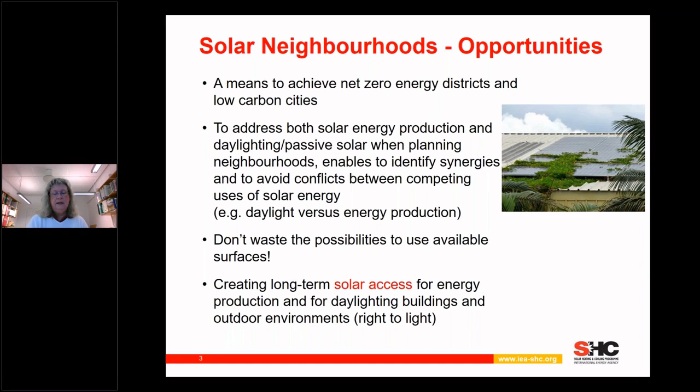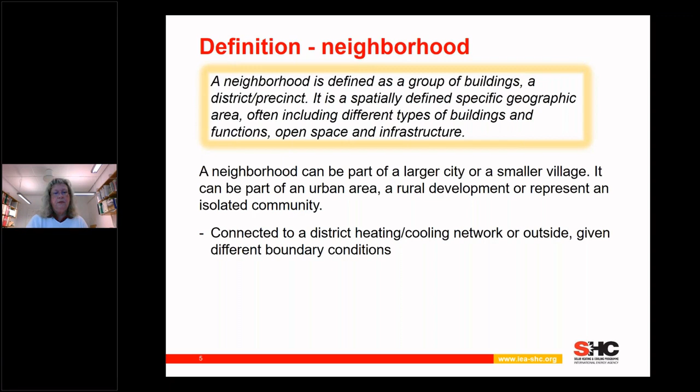Going to the project specifically: we started in 2019, and the project ends at the end of 2023, so we are midway now. The objective is to support key players to achieve solar neighborhoods that facilitate long-term solar access through good planning. We work on new neighborhood development and on improving existing neighborhoods, dealing with both active and passive solar strategies. We define a neighborhood as a group of buildings within a specific geographic area, often including different types of buildings and functions, open space and infrastructure. The neighborhood can be part of a larger city, an isolated community, or something in between, and of course it can be connected to a district heating or cooling network or outside of such, which gives different boundary conditions we have to take into account when planning.

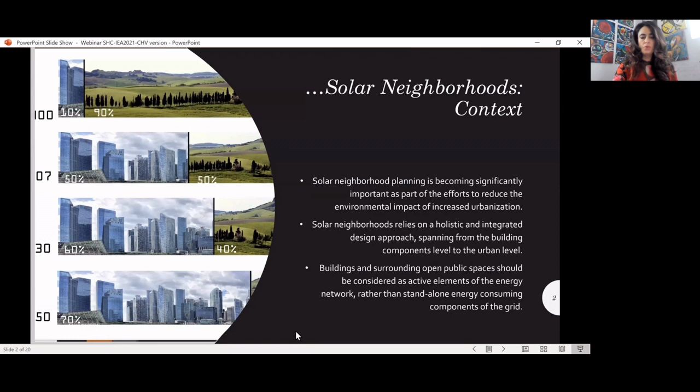Starting with a little bit of context, solar neighborhood planning is becoming significantly important as part of efforts to reduce the environmental impact of increased urbanization, where by 2050 we expect 70% or more of the world population to reside in urban areas. Solar neighborhood relies on a holistic and integrated design approach that spans from the building components and building level to the urban level. Within this holistic approach, buildings and surrounding areas, including public spaces, landscape, streets, and street furniture, should be considered as active elements of the energy network rather than standalone energy-consuming components of the grid.

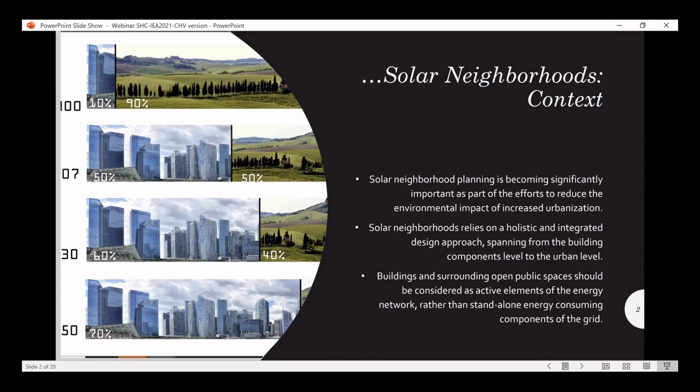At the building level, solar building design relies on passive designs in buildings. In fact, passive design is often attached to solar building design. Improving solar access together with various design principles such as thermal mass, high insulation, and airtight envelope are some of the basic principles of passive solar buildings. These principles can be implemented in all types of buildings, including residential, offices, institutional buildings, and others. Daylighting, passive heating of perimeter zones, passive and hybrid ventilation, coupling ventilation with solar chimneys, as we can see in some of these sketches, can significantly affect energy demand, reducing the energy consumption of buildings and their dependence on the local grid, which can also increase the resilience of buildings to climate shocks and climate risks.

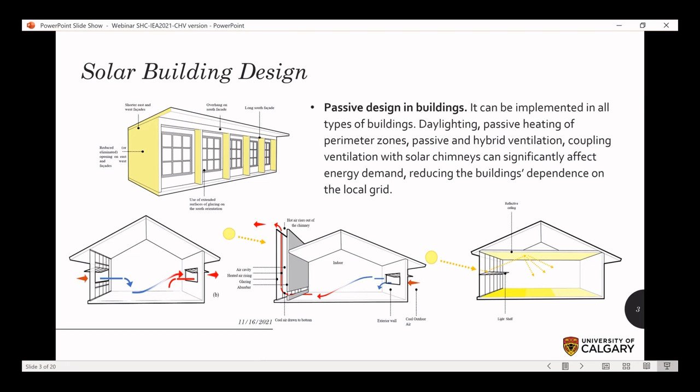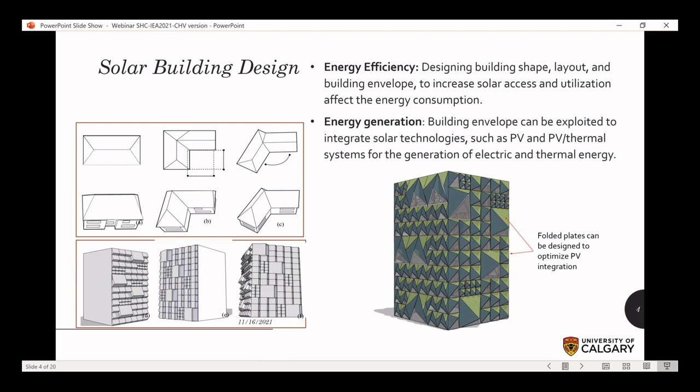Solar building design allows improvement of energy efficiency of buildings, designing building shape, layout, and building envelope to maximize solar access and utilization within the building, affecting their energy consumption. It also allows better designed solar energy generation, since a well-designed building envelope can be exploited to integrate solar technologies such as photovoltaic systems, thermal collectors, or hybrid photovoltaic-thermal systems for the generation of electric and thermal energy.

Talking a little bit about building envelope design and the integration of technology: building envelope can be optimized to maximize surface area and exposure to solar radiation while presenting architectural and aesthetic flexibility. These are some examples of a theoretical study done by myself and my group at the SECDL at the University of Calgary, where we try to optimize the building envelope shape and geometry through different designs of folded plates that allow maximizing solar radiation on these plates. We were also integrating different types of photovoltaic systems in different colors.

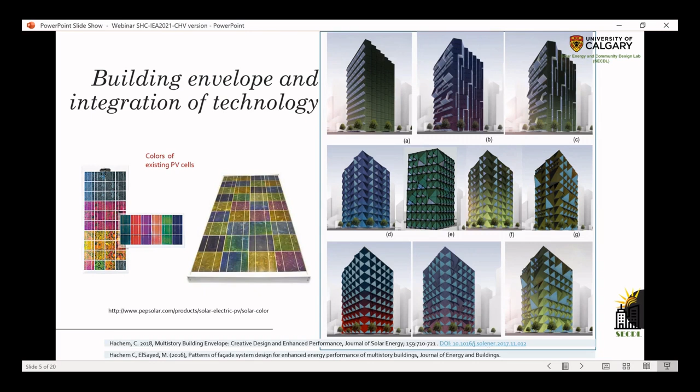At the level of neighborhood, many aspects affect optimal solar planning. For example, the type of neighborhood and the building mix present can affect building designs and, as such, available surfaces for solar technologies. Also, the ratio of mix of commercial to residential buildings within a specific neighborhood type is important, especially when the goal is to achieve net zero energy status. An optimal ratio of commercial land area to overall built land area can be between 23% and 32%, according to a theoretical study we conducted, where according to this ratio we were able to integrate enough photovoltaic panels to achieve net zero energy within a mixed neighborhood.

Density is another important and critical factor in the design of solar communities. Studies associate increased build density with sustainable development, but this should consider cumulative effects of various additional factors of a compact development, for example land use, transit accessibility, job availability within walkable distance, walkability, and others.

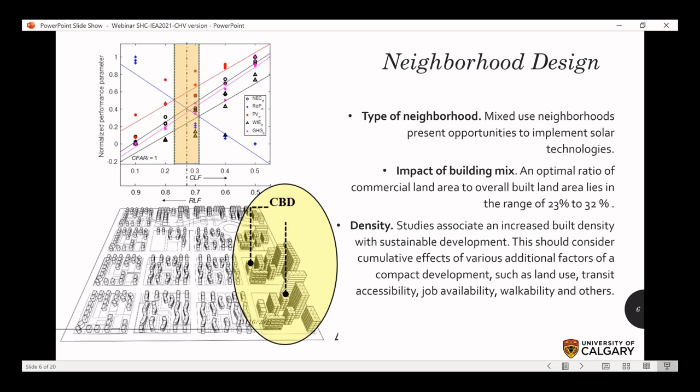There are other important elements in the design of a neighborhood that also impact their solar access and solar potential and their design as solar neighborhoods. This includes green and spatial areas. Landscape can offer solutions for the integration of photovoltaic panels as well as solar thermal collectors, and allows for generating more energy that can be utilized in these neighborhoods.

Orientation of streets can affect the potential to capture and utilize passive solar energy as well as energy output of various solar technologies. As such, they should be considered from the early design stage, and the buildings around them should be designed to get the best performance with the best orientation.

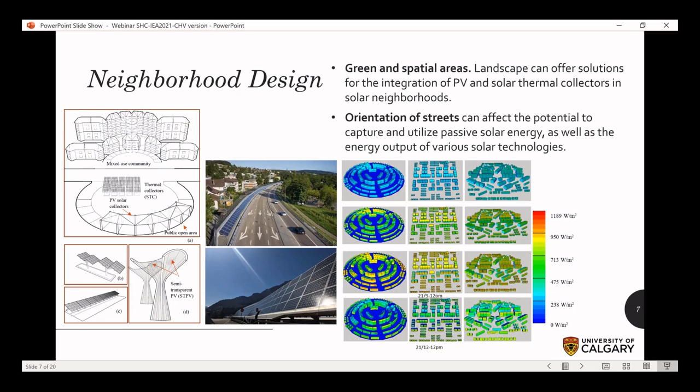Now, talking a little more in detail about the work currently ongoing in subtask A, we developed specific designs of archetypes to study solar strategies. Archetypes in this task are considered representative neighborhoods of existing or new patterns in different countries. This includes repetitive patterns of commonly applied design, such as streets, building types, shapes, density, etc.

Here is an example of commonly seen neighborhoods in North America, residential neighborhoods where we see a grid layout together with attached and detached houses.

Other examples of archetypes can represent uncommon or innovative examples. We have a few of these that were presented and proposed by the experts in subtask A, such as Sinfonia in Bolzano, the campus in Norway, and so on.

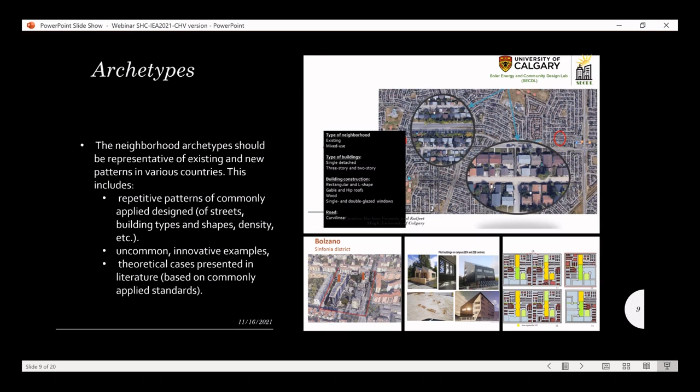Other archetypes can be theoretical cases presented in literature, or especially developed to study different strategies. Here are some examples of theoretical neighborhoods, and I will be talking a little about these and some examples of the results that we obtained in a couple of slides.

A methodology was also developed to collect information about these archetypes, including building types, materials employed in buildings and building envelope, outdoor areas, and materials employed in these outdoor areas, streets, etc. This information is collected in what we call a matrix, an Excel form that can facilitate input into various simulation tools, allowing us to perform urban level simulations.

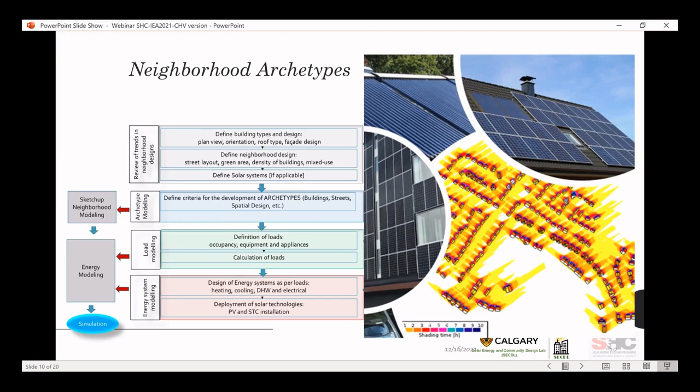Once the base neighborhood of each archetype is established, various solar strategies can be analyzed. Here I'm presenting some of the theoretical examples I mentioned, what we call neighborhood units. These are small neighborhoods designed according to various sustainable measures, ranging from residential-dominated neighborhoods to higher density neighborhoods with commercial centers that include different types of trades and different types of buildings.

The study aimed at analyzing various renewable energy strategies and the role of solar energy for thermal and electrical production. I want to highlight that PV were accommodated on roofs and some portions of the facades when available, meaning when we have higher rise buildings. Solar thermal collectors are accommodated in parts of the roofs when PV area allows for this, and in landscape areas.

Results of this study show that PV electricity plays an important role in fulfilling a significant portion of the total electricity needs of all the neighborhoods, especially up to 95% for small scale or less dense neighborhoods.

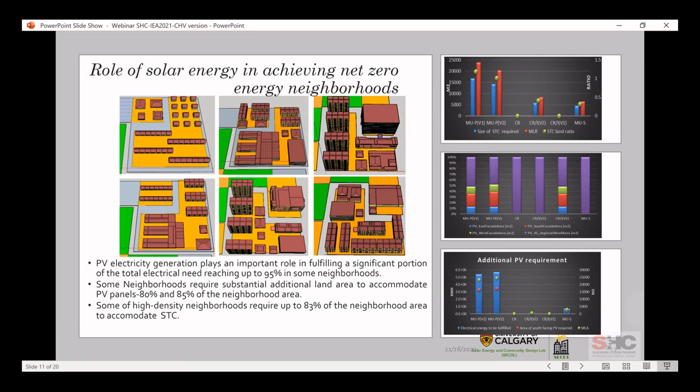In this example, some of the small neighborhood units shown before were combined together according to their electrical energy performance, to allow achieving net zero electrical energy. In this case as well, PV plays a significant role in achieving net zero electricity status. In all these neighborhood combinations, the major portion of PV electricity is supplied by roof-mounted PV systems.

The study shows that on-site sources can supply between 19% and 45% of the thermal requirement for the neighborhood combinations, but we still need additional solar thermal collectors, especially in high-density and larger neighborhoods. The landscape area required to install these collectors is significantly lower than the examples I showed before for smaller neighborhoods.

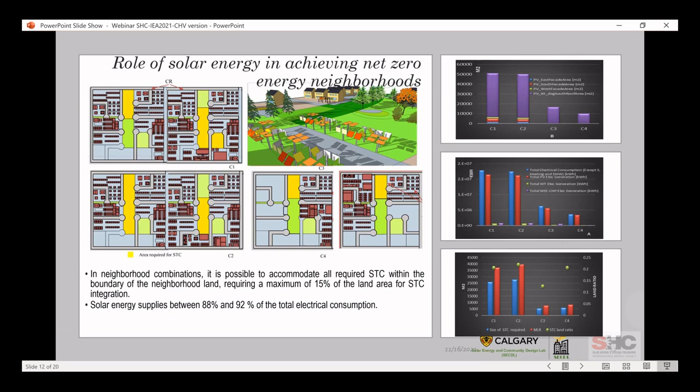The landscape area can be about 15% of the total land of the neighborhood, which, as mentioned, can be much lower than examples before, but also more feasible from an urban planning point of view.

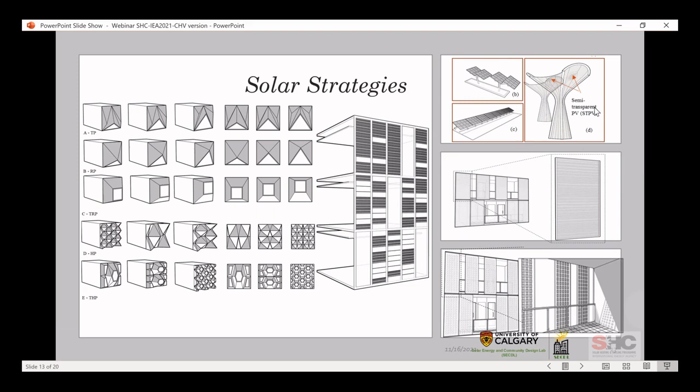Now, coming to the design of solar strategies and their analysis, different solar strategies will be analyzed using the archetype concepts I just talked about. This includes, but is not limited to, integrated solar technologies in roofs and facades, and landscape integrated solar systems that can range from very traditional standalone elements to more interesting and more designed solutions.

The workflow developed to implement and analyze solar strategies takes into account various factors such as spatial design of the neighborhood, optimal surface areas to integrate technologies, neighborhood operation, and interaction with the local energy system, both electrical and thermal.

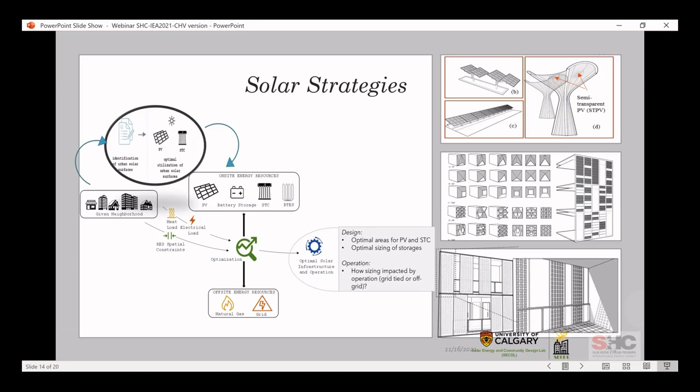Coming to the deliverables of subtask A, there are a number of them, but I want to highlight the most important: two summer schools, or fall schools, are designed. One of them, a fall school, was already conducted in September and October of this year.

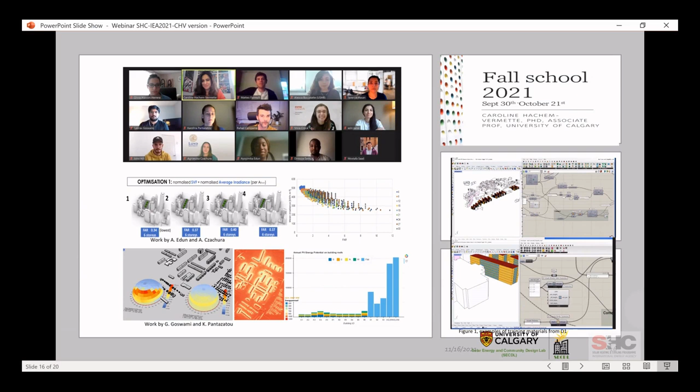It was attended by about 14 PhD students from 6 countries who were trained in complex urban level simulations. Instructors from 9 different institutions were involved in the training. The next summer school will be conducted next year, hopefully in person in Calgary.

The final deliverable of subtask A, which is still under development as results and analysis are conducted to get to this stage, will consist of a web-based database that presents various solar strategies and their potential application in example neighborhoods under different climates.

These neighborhoods, or solar technologies, can be selected according to the type of neighborhood and the available archetypes that were studied, with available results shown to give examples of how to apply these solar strategies and what their impact is. This can offer flexibility of design for planners, architects, developers, and other key stakeholders by presenting examples of potential solar solutions for different settings.

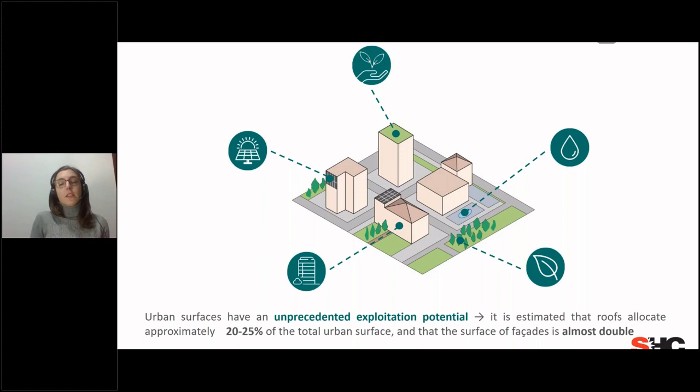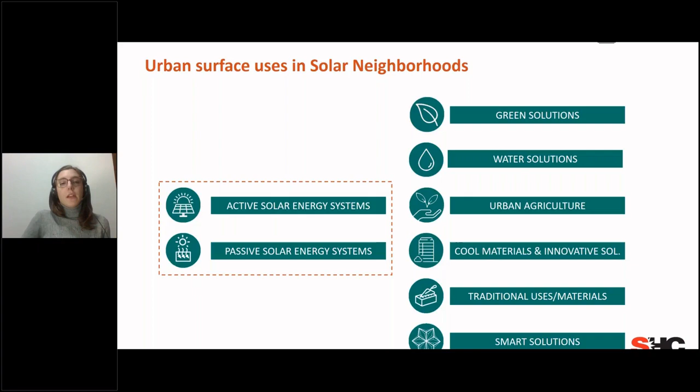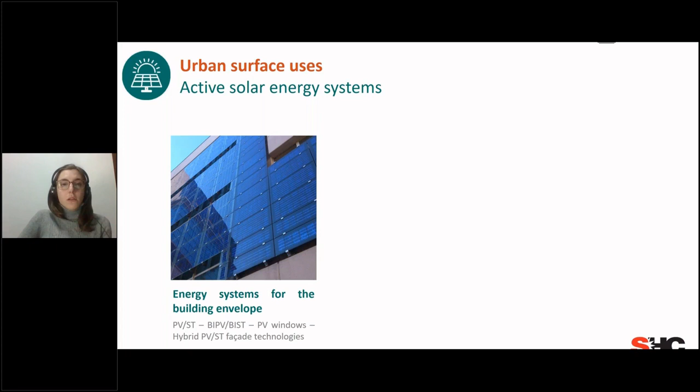So what we are focusing on is not only active and passive solar energy systems, but a broader variety of solutions which we collected and discussed among the task experts in subtask B. When we refer to active solar energy systems, we include not only energy systems from the building envelope, which are the wider known solutions, but also energy systems from ground surfaces, such as PV pavements and other asphalt solar collectors for ground surfaces, and also energy systems for urban features, such as the acoustic PV road barriers you can see in our picture.

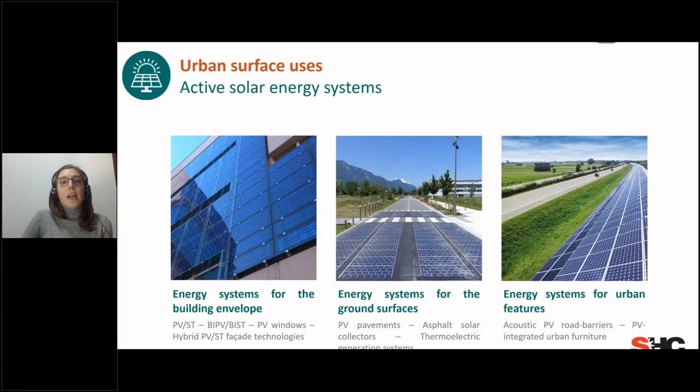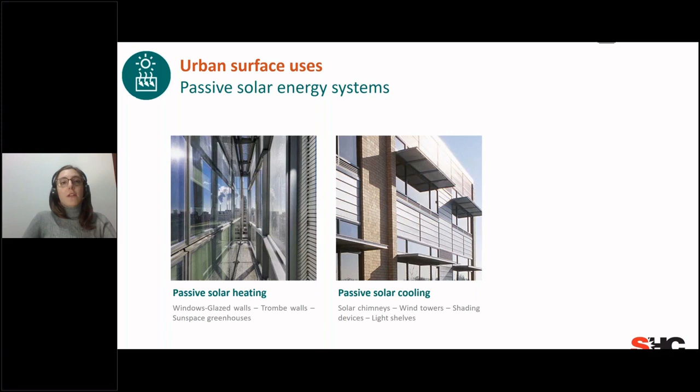And when we refer to passive solar energy systems, we focus on passive solar heating and passive solar cooling. But we also broaden our focus to other solutions, as I previously mentioned. For example, we have green solutions, which include not only vegetation on the ground, but also green building elements, such as green roofs and green facades, and other innovative technological solutions, such as microalgae panels for the production of energy.

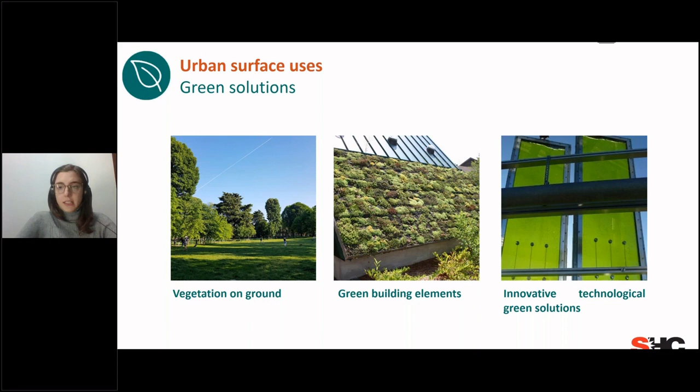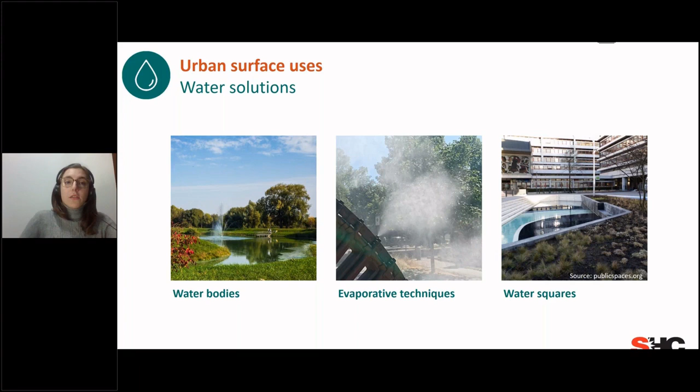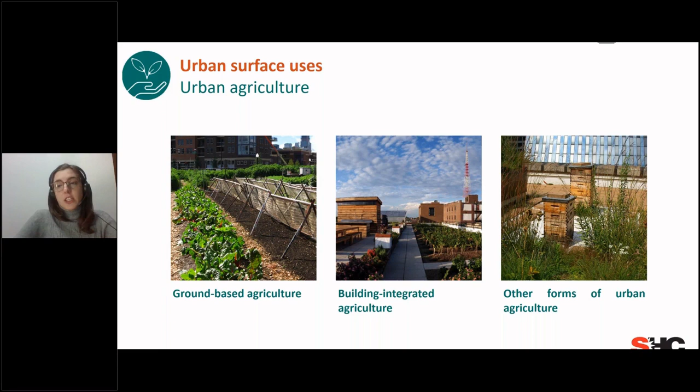We also have water solutions which might be used in solar neighborhoods, from water bodies to evaporative techniques to reduce peaks of air temperature during summer, to water squares. We also included the potential to use urban agriculture, both ground-based, building integrated, or other forms of urban agriculture, such as beekeeping in our solar neighborhoods.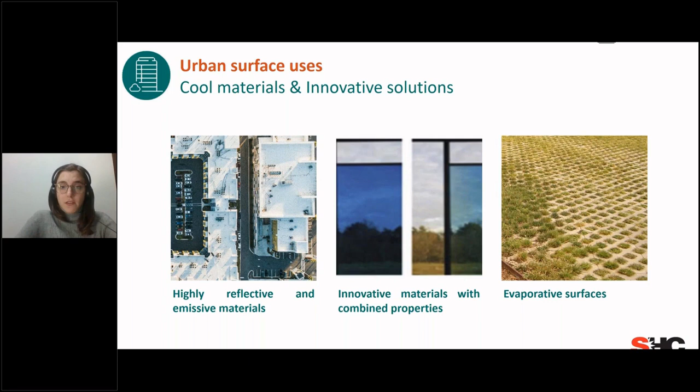And last but not least, we also consider cool materials, so highly reflective and emissive materials, which allow the surfaces of the building envelope to remain cooler, and which are also strongly related to solar radiation, and other innovative solutions. We also consider, obviously, the presence in solar neighborhoods of traditional uses and materials, which actually build our urban areas, but also the potential for smart solutions.

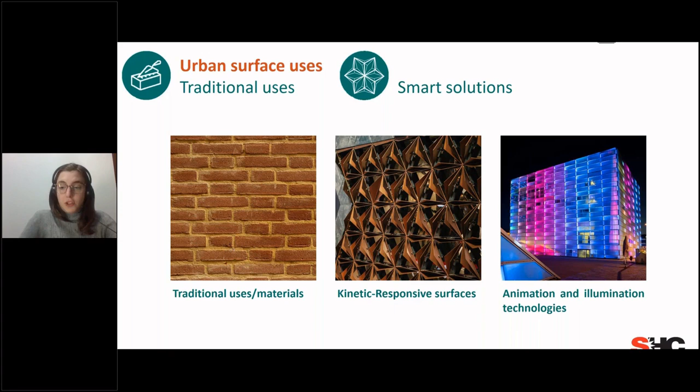What we then discussed in subtask B are the conflicts and synergies which may arise among surface uses. So the question we posed ourselves has been: can we integrate solar active and passive systems with other solutions in order to better exploit urban surfaces? What we did was create a sort of matrix in which we analyzed conflicts and synergies among solar active energy systems and other solutions.

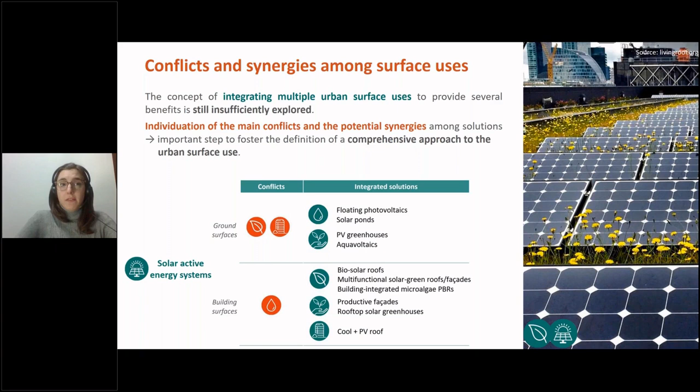One case is the one you can see in the picture on the right, a biosolar roof, which integrates PV systems with a green roof, which also acts as a cooling element for the panels, helping to enhance energy efficiency. But there are also other solutions, such as multifunctional solar green facades and cool roof integrated PV. So this is just an example of what we would like to do in fostering the use of urban surfaces.

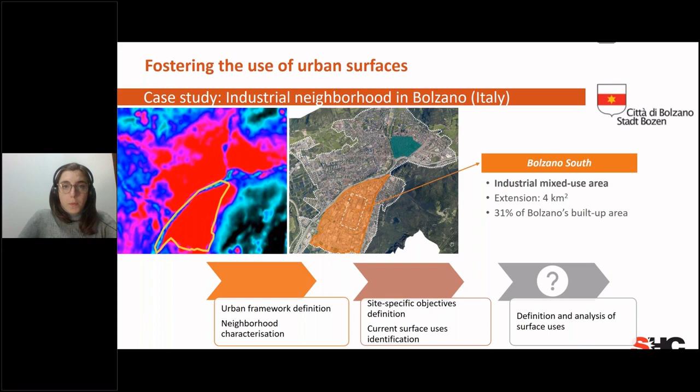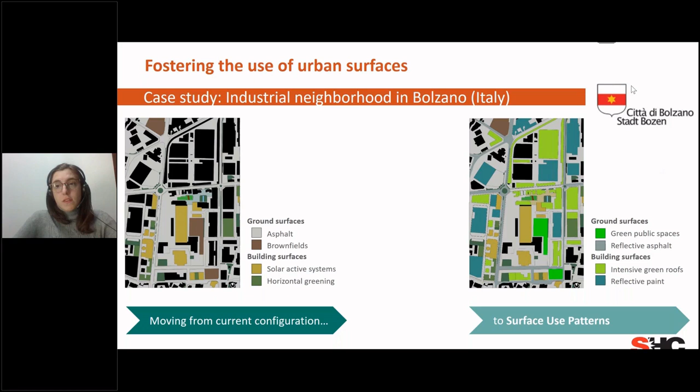This is the case study of an industrial neighborhood in Bolzano we are analyzing in the context of Task 63. This is relevant because it covers a large portion of the city of Bolzano. What we would like to propose through our activities in the task is a methodology for moving from the current configuration of the district, which integrates common surface materials and some solar active systems, to a surface use pattern - a configuration of the district which integrates more innovative solutions, where the use of solar active systems is enhanced, and there are also other solutions such as green solutions.

How might this be done? Through several methods, integrating on-site monitoring, the use of environmental tools, and also multi-criteria approaches.

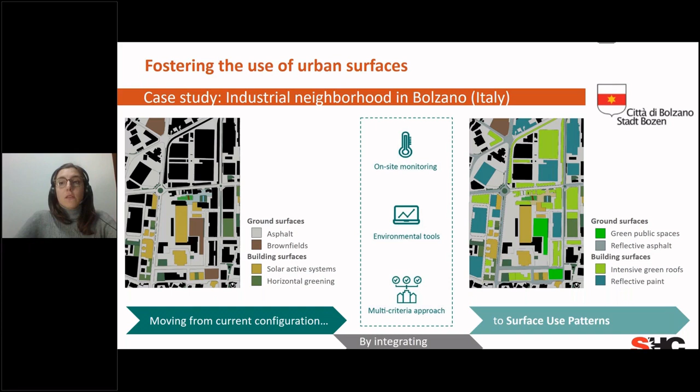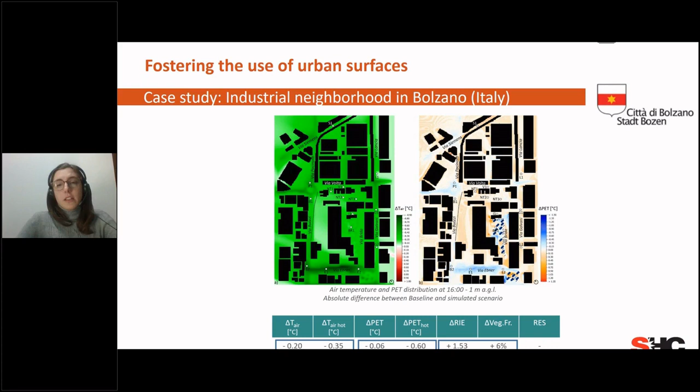And what is then done, of course, the results are analyzed. Here you see some examples of analysis related to environmental parameters, such as air temperature and human thermal comfort, but also the analysis of solar potential and so on.

So what's coming next in relation to these activities in subtask B and task 63? First of all, by the end of February, we will release our first deliverable, a report on surface uses in neighborhoods, focusing on how to define the most suitable uses, but also avoid conflicts and create synergies. If you're interested in the topic, keep an eye on our website.

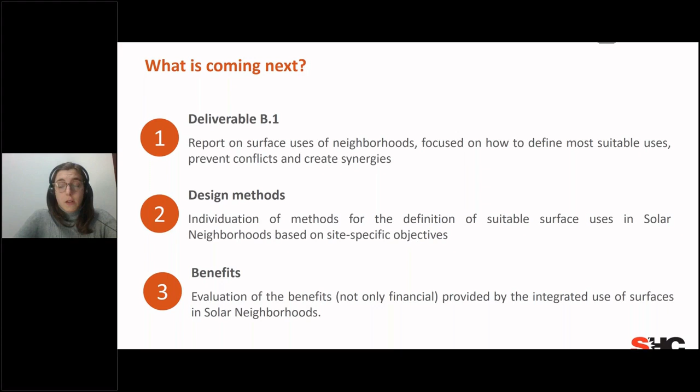You will soon find our first deliverable. We will also focus, as in the example shown, on identifying methods for defining suitable urban surface uses in solar neighborhoods, based on site-specific objectives. We will also focus on the benefits, not only financial, but also environmental and social, which the integrated use of urban surfaces might provide in solar neighborhoods.

And in relation to this, we are also working on the identification of the potential co-benefits related to the use of urban surfaces in solar neighborhoods.

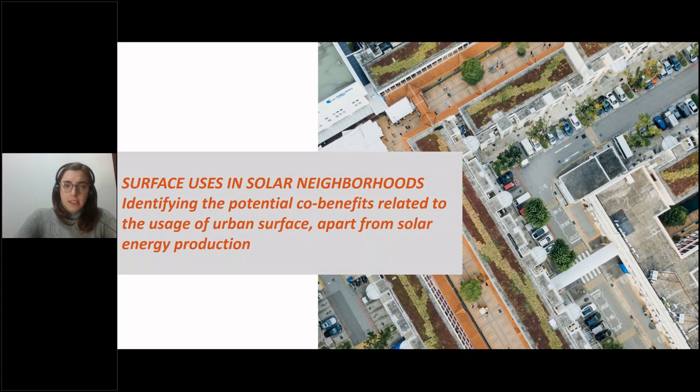What we highlighted in our discussion and work in the task over these two years is that urban surfaces are a key resource to tackle several issues related to urbanization and climate change. They offer benefits not only related to renewable energy production, but also other sustainability benefits, such as rainwater availability and food provision, as well as fostering climate resilience. For example, they allow improved management of urban climate, preservation of habitats and biodiversity, contribution to stormwater management, and amelioration of air quality.

What has been the first step in understanding the relevance of these potential benefits in solar neighborhoods? It has been a survey aimed to identify priorities in the design and implementation of solar neighborhoods. We asked participants to evaluate 55 urban challenges from 0, meaning not at all relevant, to 10, meaning extremely relevant.

We've done and are doing this in two phases. In 2020, we opened this survey just to Task 63 experts and got 25 responses. This year, in 2021, we are diffusing this survey also among external experts and practitioners. This activity is still ongoing, so you are welcome to contribute.

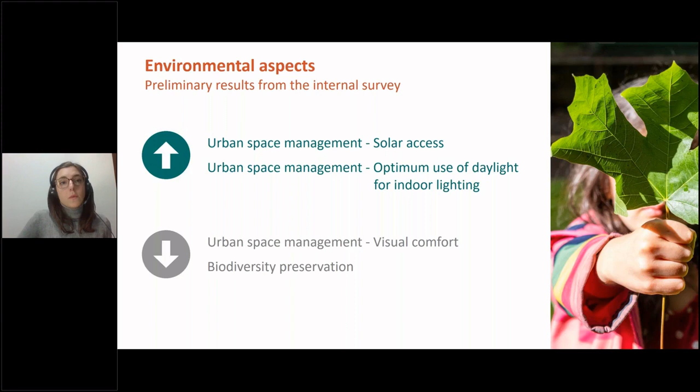That's why we are distributing the survey among external stakeholders and asking for your input. Another aspect we are analyzing is resource management. In this case, the modern and renewable energy source and the provision of clean, local energy consumption were identified as most relevant, while waste reduction and food security were less considered.

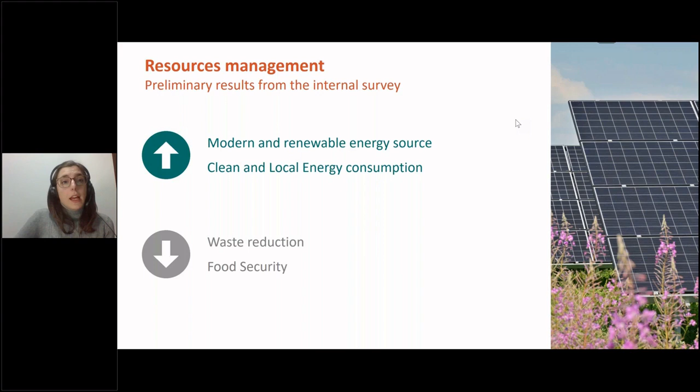If we move to social aspects, also in this case we got some surprises. The presence of public spaces and increased quality of life for health and well-being were highly considered by the experts, but acoustic comfort and gender equality, for example, received a very low score. We also analyzed economic aspects.

Here, peer-to-peer trading of energy and prosumer-based business models are perceived as very relevant by task experts, while real estate value increase and the increment of energy prices were less so. As mentioned before, the survey is open to everyone and will take approximately 10 minutes to complete. Answers will be anonymous and results will be reported in an aggregate way.

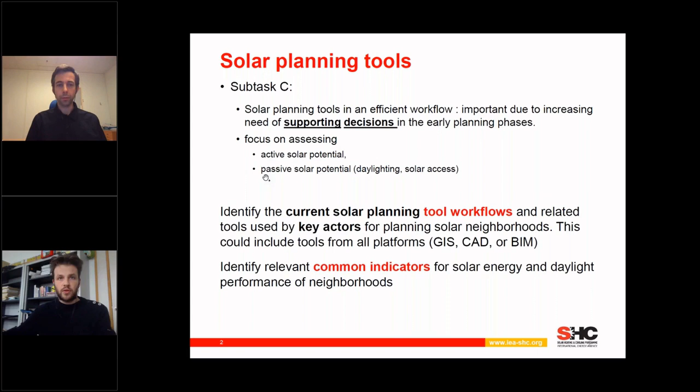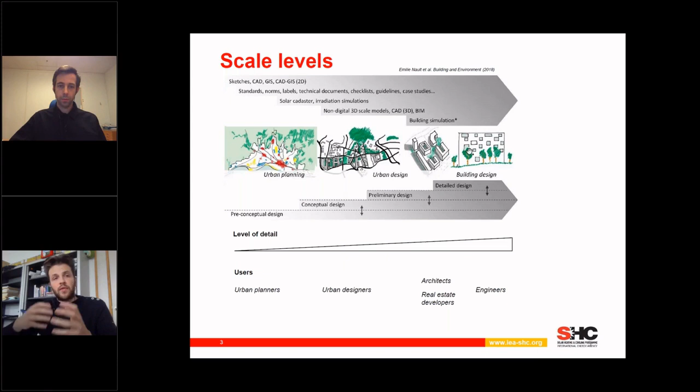Just an illustration of the complexity could be seen here from an illustration of Emilie Nault. Here you can see that in the planning of a solar energy neighborhood, you have many different factors that appear, and one of them is the scale. Because if you take the urban scale or the building scale, you have many different things to address. The data is not the same, the quality of the data is not the same, and you have different layers of tools that you can use, and you also have different types of actors and users at each step.

So in what follows, we will show you some achievements we have been doing in subtask C: one about gathering smart and relevant performance indicators, one about trying to gather workflow stories to identify current tools and best practice, and some comparisons of current tools.

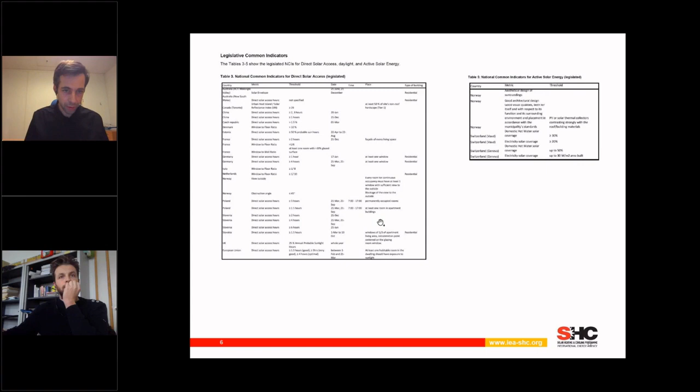Yes, thank you, Martin. So one of the first things that we did within the task was to gather something that we called national common indicators. They are basically key performance indicators that are very specific to the participating countries, and we gathered those common indicators that were both related to the active solar energy potential, meaning, for instance, the solar thermal potential or PV potential, but also the passive solar energy potential.

And here you see one of the tables that we found from looking at legislation in the participating countries, for instance, when it comes to direct solar access. In some countries, the legislation states that a bedroom should have at least 2 hours of direct solar access at a certain date, while other countries might say that at another date it's maybe 1 hour or 3 hours. There are pretty big discrepancies between the countries, even though they are at the same kind of latitude.

When it comes to active solar energy legislation, there are not many countries that actually prescribe that when you are constructing new buildings you have to install an active solar energy system, be it PV panels or solar thermal panels. So it's kind of interesting to see the difference between the different countries.

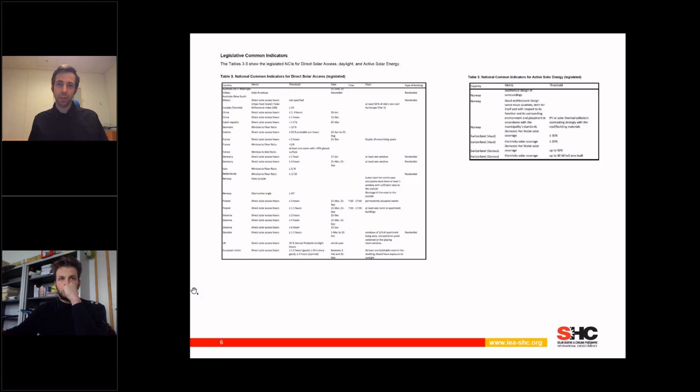Can you do next, Martin? Yeah, so then we looked at what are the implications of those different common indicators. That's why we took 3 national common indicators to showcase the implications of those common indicators.

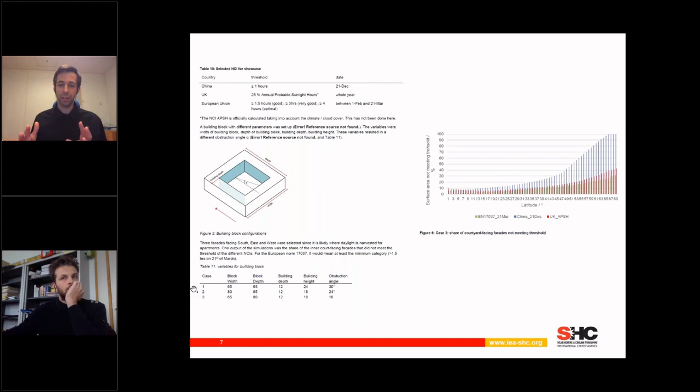So we took a rather random courtyard building and simulated it at different latitudes, looking at the different solar conditions and then applying the different national common indicators. On the right, you can see this graph showing the share of courtyard-facing facades that are not meeting the thresholds of the national common indicators. The higher the latitude, the harder it is to reach those thresholds, and you can see this pretty well in the graph.

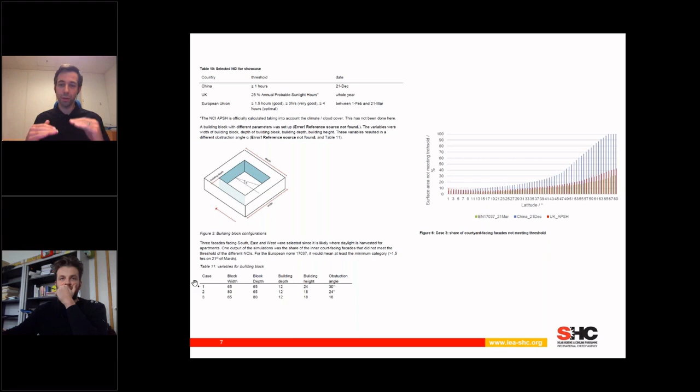This demonstrates that even countries at the same latitude might have a very different approach to what solar access is and what level is considered good solar access.

Next, parallel to gathering the national common indicators, we were also interested in how key actors in the design process of solar neighborhoods use tools, and that's why we have something we call the workflow stories, where we gathered this information.

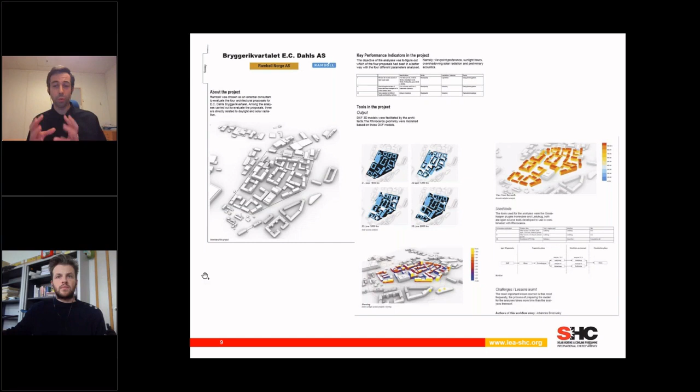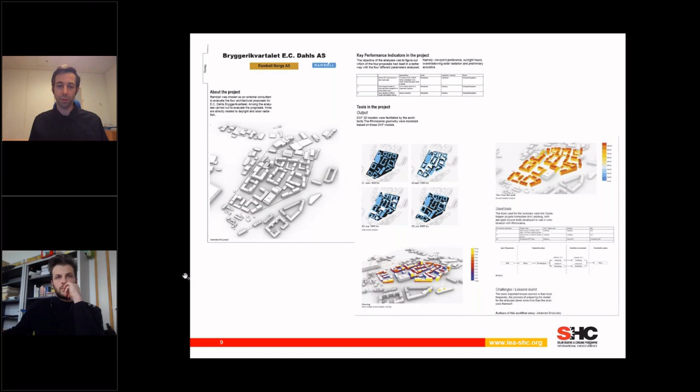But what we were also interested in was not only the key performance indicators, but also which tools they used to assess those indicators. So for each of these workflow stories, we asked the people who wrote them to provide input for the tools, output, and a description of the workflow. Since urban planning is a rather difficult process, you might have different data available with different quality, so you may have to use different tools to answer questions about the performance of a neighborhood.

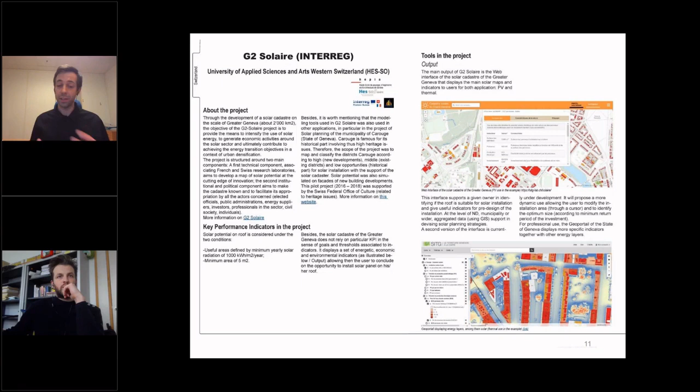Here's another example of an advanced solar map, developed by one of the task experts, where you can get more information about the conditions for your real estate property if you're interested in installing, for instance, a PV system or a solar thermal system.

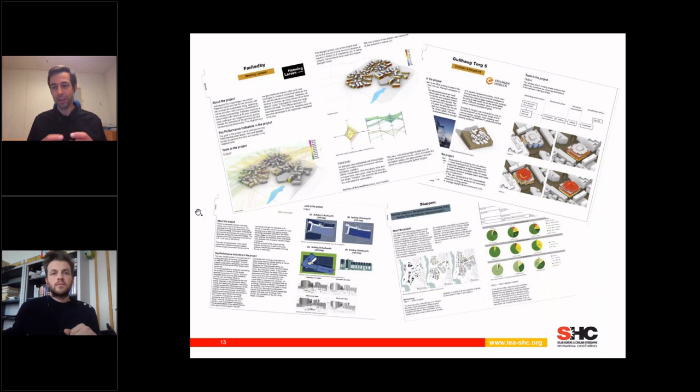These kinds of simulations are not very simple to do, and you have to find a way—sometimes you even have to develop your own modules to get the result. Here's just an overview of some of the other workflow stories we gathered from different companies and academics, where people used different tools to analyze the potential of solar neighborhoods.

I will finish with one last thing we wanted to study within the task. As Yuri just mentioned, there are many different tools, so one thing we thought was to try using a maximum of these tools doing the same task—what we call here a benchmark study.

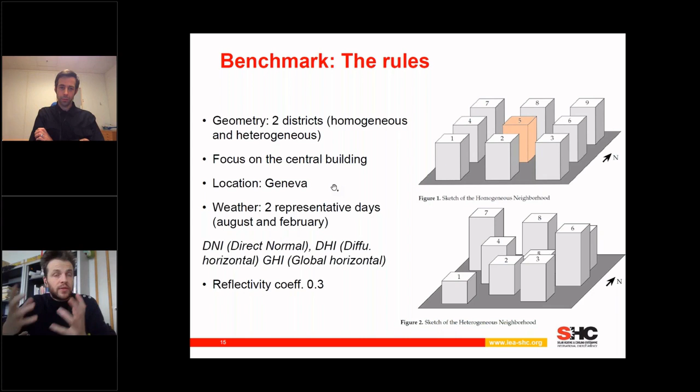For this study, we set up some rules. The rules are quite simple: we use two different districts, one which is like a grid district, and the other more random, happening in Geneva. We provide the experts with the geometry, the location, and the weather data, so everyone has the same simulation initial conditions.

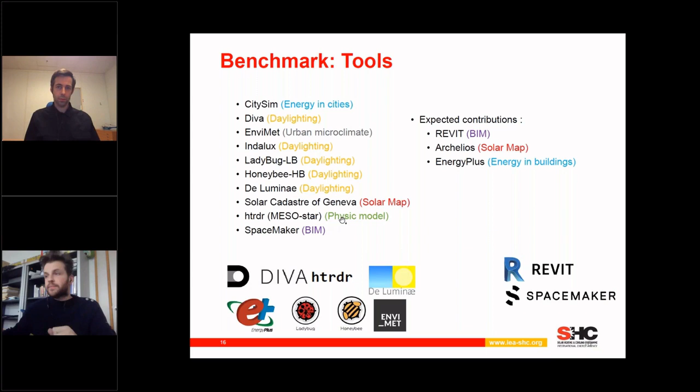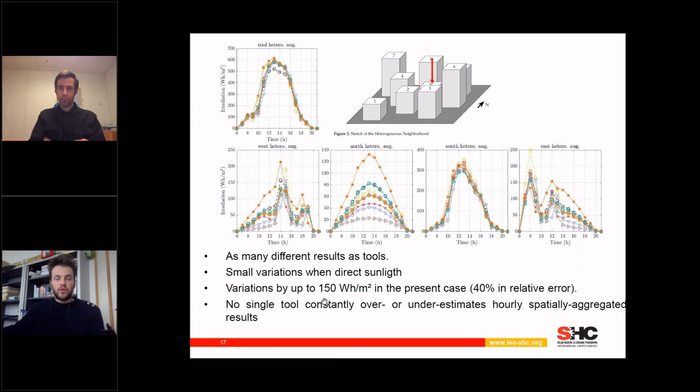We can see that there is usually less variation when there is direct sunlight, for example on the roof or on the south facade. We have variations that can reach up to 150 watts per square meter. Also, we don't have one tool which is constantly over- or under-estimating the solar irradiation predictions.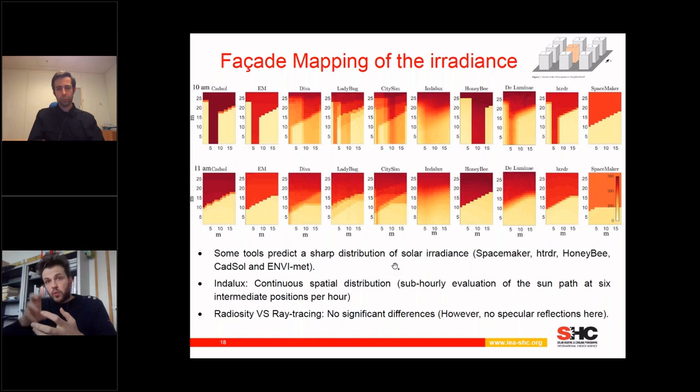So to finish, here we are at the midterm of the task. What we plan to do is a roadmap for the improvement of the workflows and solar planning tools. We showed you some of the results we got, and all these first results and studies are here to set a state of the art - where are we now, what are the tools, what are the KPIs, how do different tools perform compared to each other. In the second part of the task, we want to have a vision of what we should do and set different milestones to improve this workflow in the context of a solar neighborhood. Thank you for your attention.